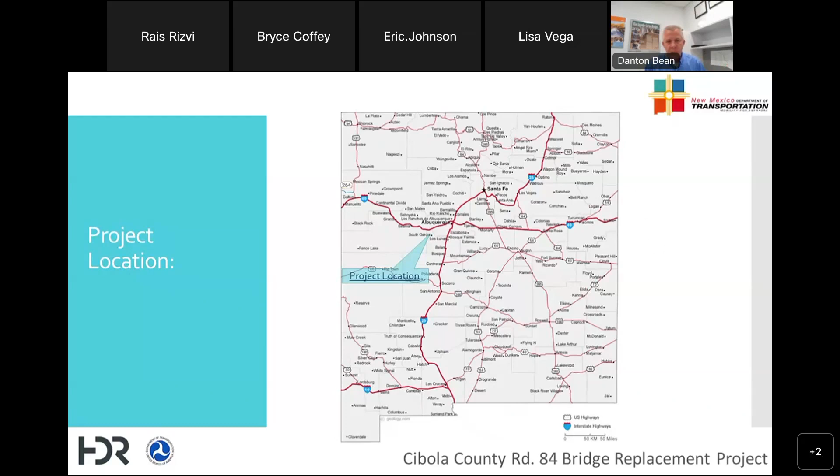So now let me describe a little bit about the project location. The project is located about 30 miles west of Albuquerque. And if I zoom in a little bit closer to the location, you can see I-40 on our slide, and at exit 126, if you go south on New Mexico 6 a few miles, you'll intersect with Cibola County Road 84.

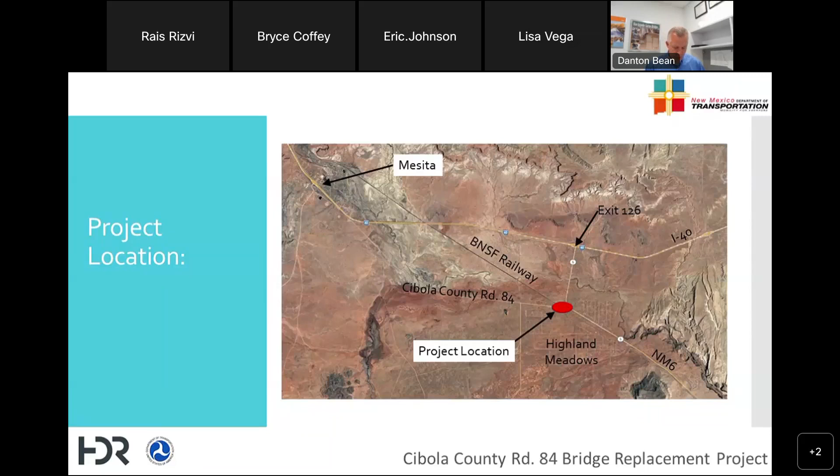You may also know this road as Historic Route 66 or Sparrow Hawk Road. And then zooming even closer into our project location, from that intersection, if you go a few hundred feet to the west, is the location of the existing bridge, and that's the structure that we're here to talk about in replacement.

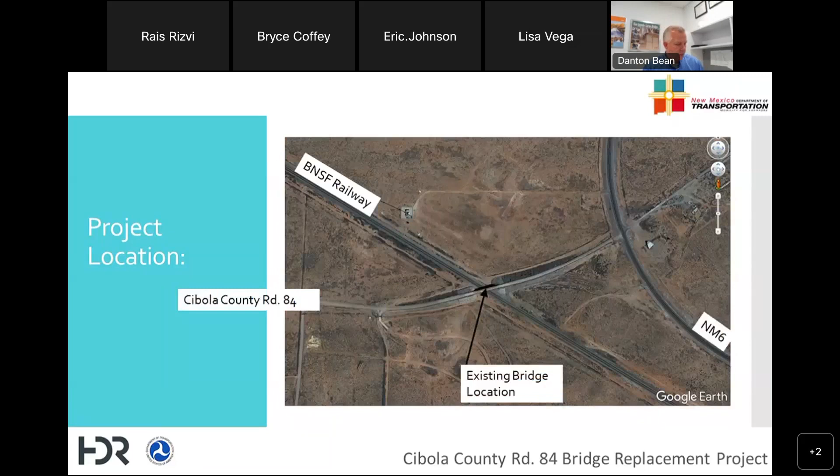Here's a picture of the project area looking west. You're probably real familiar with this view. Those that live in this area, you can see the posted weight limit sign to the right, and the profile of the roadway going up and over the railroad tracks.

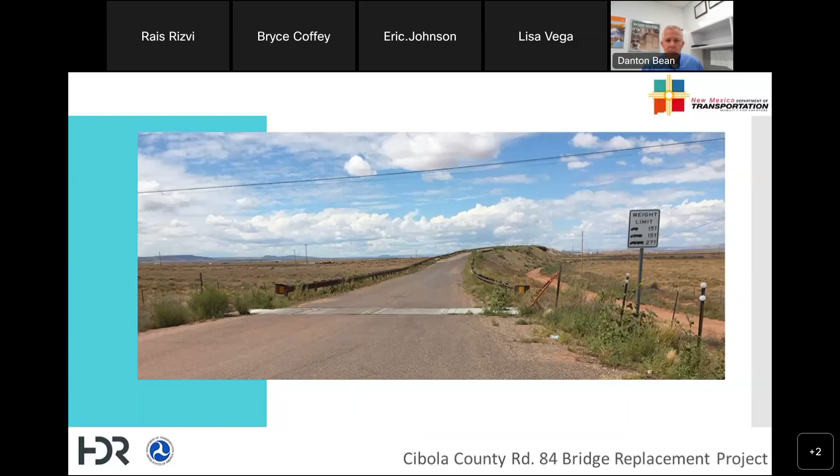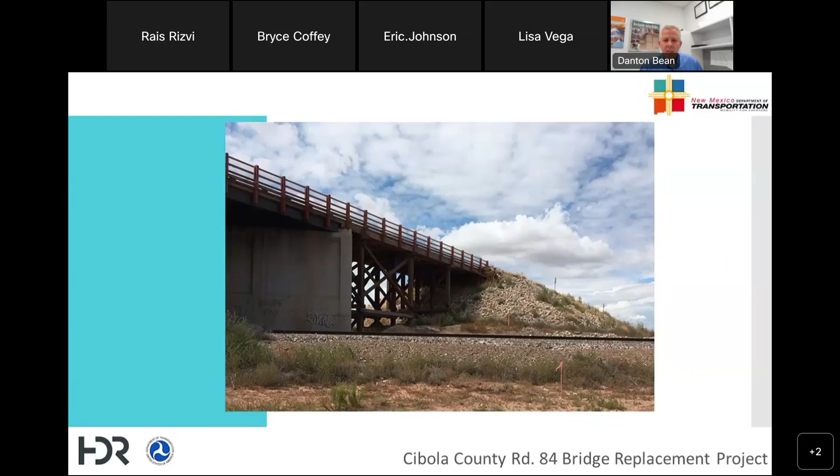Here's a view that's down closer to the bridge at the railway elevation, looking towards the bridge. You can see the concrete pier wall and the timber members of the end spans of the structure. This is a view up top on the roadway, and you can see the narrow width of the bridge and some of the failures that have happened on the roadway approaching the bridge.

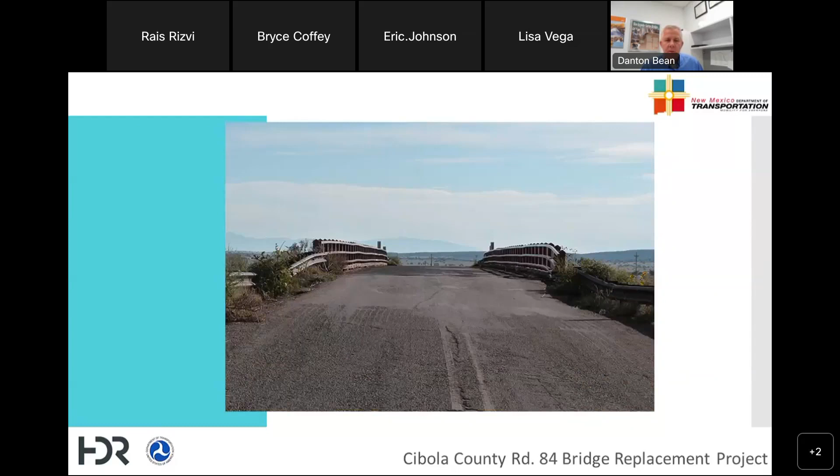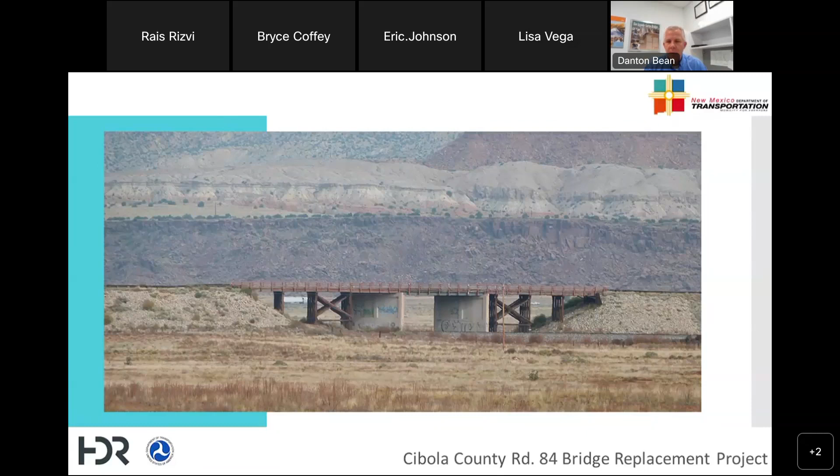This view is a little bit farther away from the structure and looking towards the north. Again, you can see the existing structure with its timber end spans, the concrete pier walls adjacent to the railway, and then the embankment, the approaching embankment that's built up with some rock covering rock riprap.

All right, so now let's talk about the purpose of the meeting.

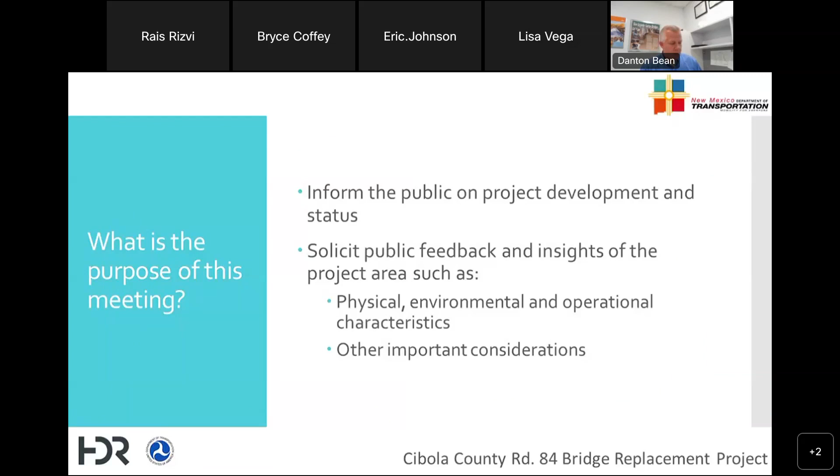This is an important meeting in our development of our project. We want to give the public information about the development, what has been happening, and also ask for your feedback and insights about the project area and the proposed improvements. That's really what we're doing tonight.

I want to talk a little bit about the history. The project started in 2016 with a study, and in that study we looked at several different alternatives. First, the no-build alternative, meaning there would be no improvements, no construction. That alternative was rejected pretty quickly—it would not meet the purpose and need of the project, so it was eliminated quickly.

A rehabilitation alternative was also considered, which would improve the existing structure and roadway to an improved level. Again, that alternative was eliminated pretty quickly because it did not fulfill the needs and purpose of the project. So then there were the build alternatives, meaning something new would be built.

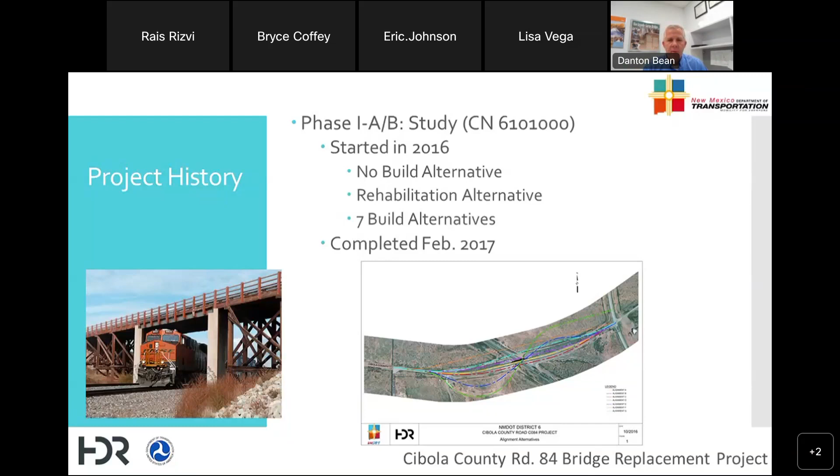We looked at seven different build alternatives. In the small exhibit towards the bottom, you can see some of the different alignments and alternatives that were considered. The study effort was completed in February of 2017. Here's a larger zoom view of the alternatives considered in the study phase.

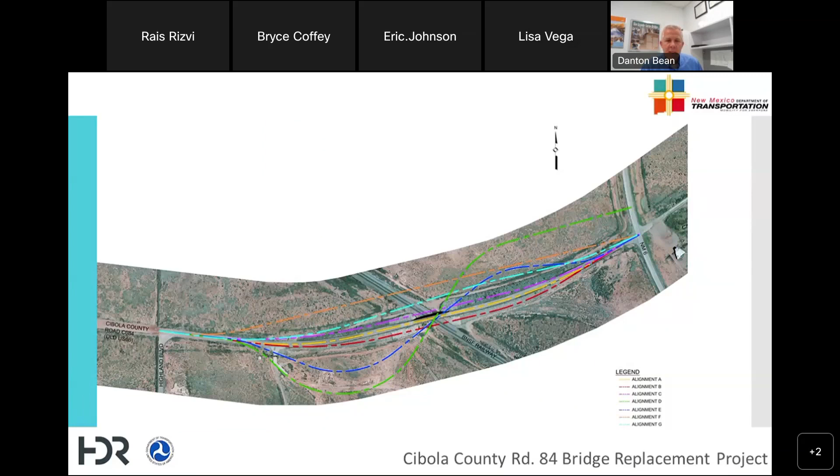We'll get into a little more detail about the selected alternative out of the study in just a minute. But before that, let me continue talking about the history of the project.

Another important aspect of the project development is the environmental documentation, which also started in 2016. An important part of that is public meetings and outreach. We held a public meeting in October of 2016, and there was a great turnout with a lot of strong support for an offset alignment and for allowing traffic to remain on the existing alignment during construction.

The other thing we heard during that meeting was a request for an additional left turn lane on New Mexico 6 at Cibola County Road.

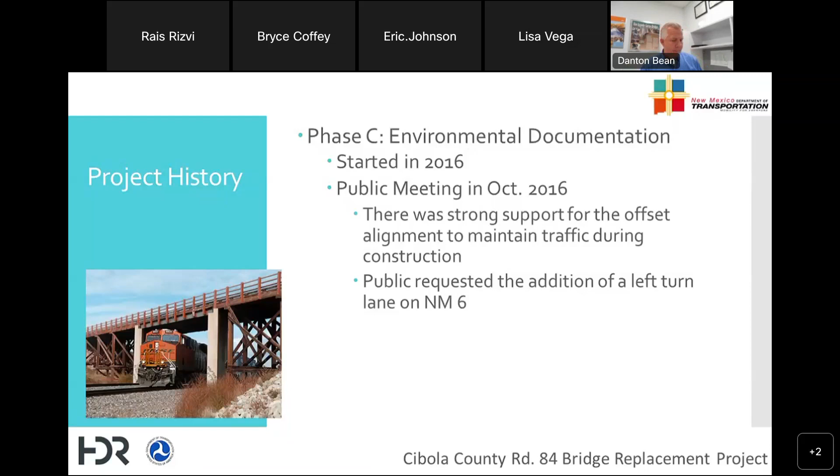The development of the project continued in 2017 to a preliminary design level, or 30% design. Development was paused in July of 2017 because there was a lack of funding—no funding for construction was programmed at that time—so development was stopped.

Now jumping to recent efforts: in November of last year, the design development was reinitiated. Part of the thinking around reinitiating that effort was the possibility of additional funding coming, and we wanted to get this project ready in case that funding became available for construction. We'll get into that funding discussion a little more in just a minute.

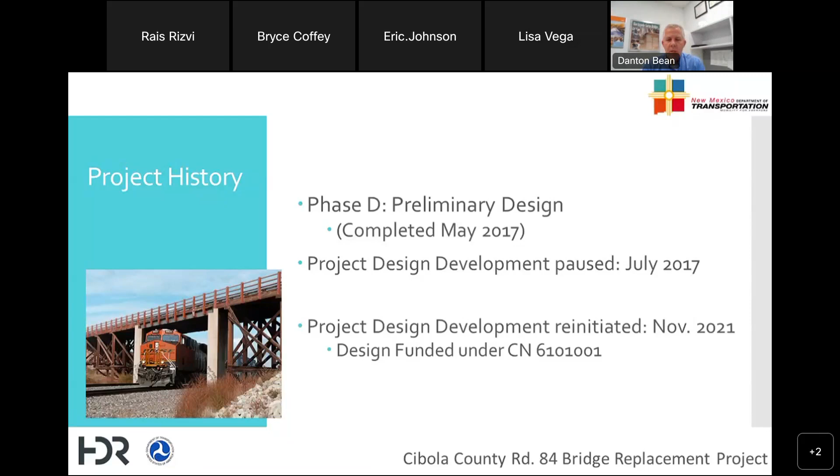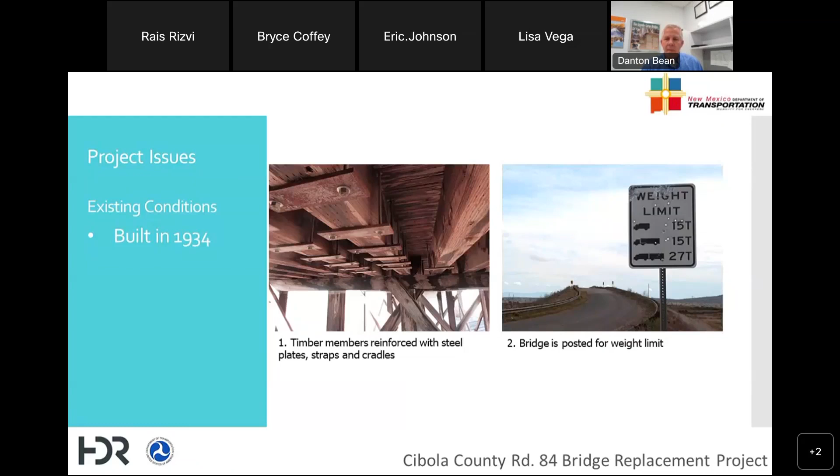Now let's make sure we understand the issues we're trying to correct. First, the bridge was built in 1934 and has really outlived its design life. Some of the timber members are reinforced with steel plates and straps, and the bridge is posted for weight. One other thing we heard during the public meeting was that these weight limit signs are often vandalized, removed, or damaged, and some people ignore them.

The bridge is narrow and does not meet current standards. The height and width for the railroad tracks also do not meet current standards and do not meet the railroad's desire for an additional track at some point. So those are really the issues we were trying to fix.

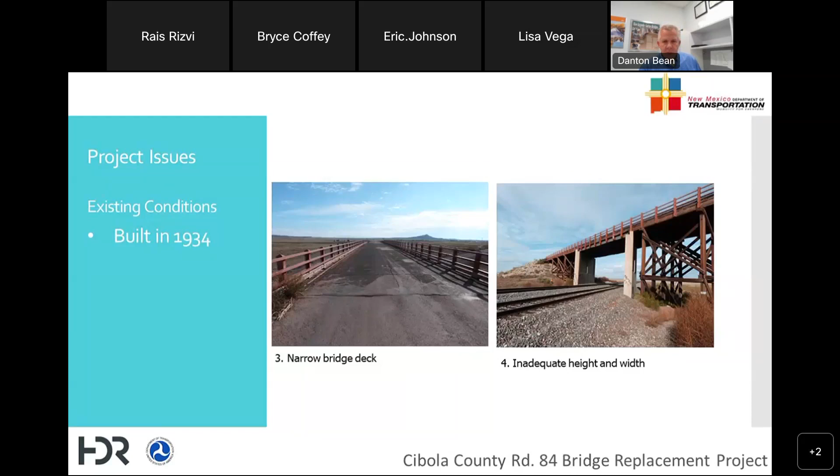Now let's make sure we understand the purpose of this project: to improve the safety and access for the public using this crossing, and to meet current standards for both BNSF and the Highway Department.

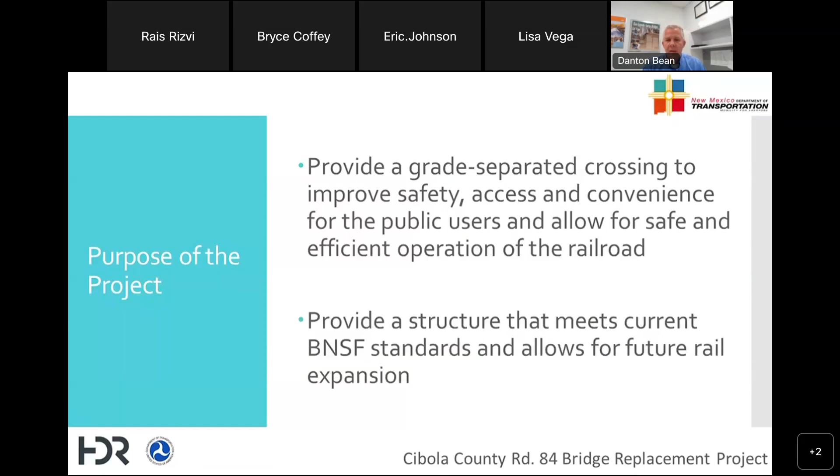Now I want to discuss the selected alternative. As mentioned, there was a strong voice at the public meeting toward an offset alignment for construction. The new roadway and new bridge are proposed to be offset to the north, allowing traffic to remain on the existing roadway while the new facility is being constructed. Once the new bridge and road are built, we would remove the existing bridge and roadway pavement.

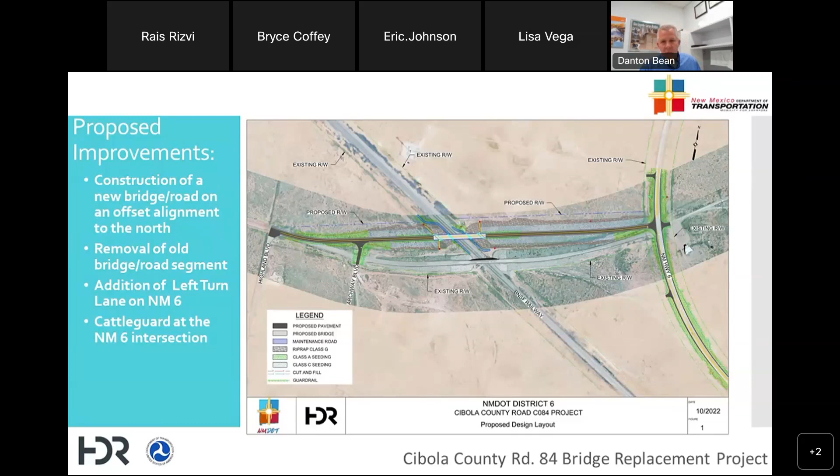We also would like to maintain the open appearance from the roadway with open steel railing, and then we want to improve upon the width and vertical clearance.

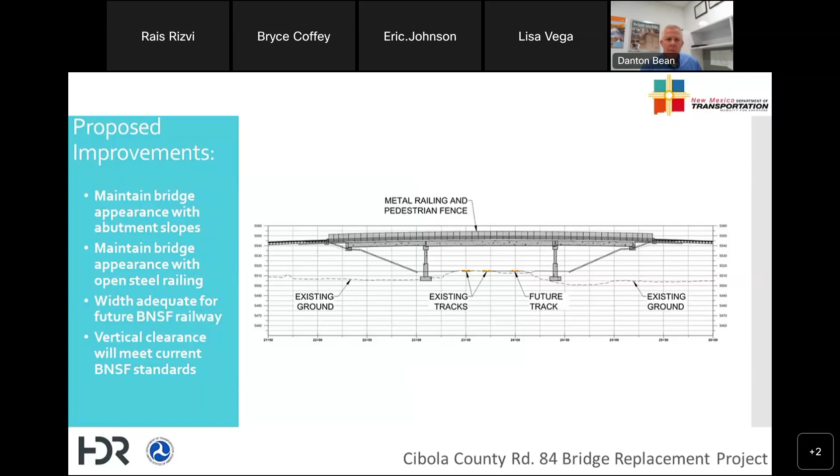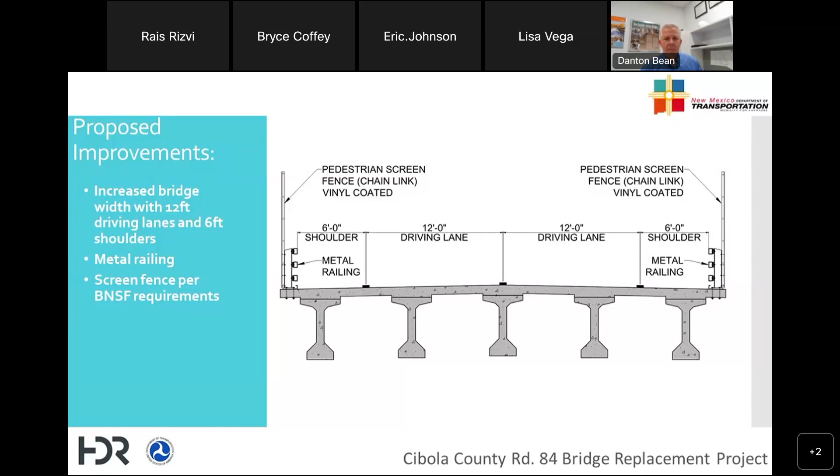This is a typical section of the proposed bridge, and you can see that it's going to be wider. We'll have shoulders on the roadway, driving lanes, and you can see the metal railing on each side. We're also proposing the addition of a pedestrian screen fence on the side of the bridge to help with safety of pedestrians and protect the railroad tracks.

Now let's talk a little bit about schedule and where things are going. We expect to complete the design of the project by the midpoint of next year. We also want to make sure we clearly communicate that the construction timing has not been determined—there is still a funding shortage for the project, and that funding has not been identified.

We were hopeful that additional funds could be available for construction. There's been a significant increase in construction costs that seems to be absorbing available funding, and allocating funds for this project hasn't occurred yet. It is definitely a priority for the district, and they're doing all they can to allocate funds for construction, but at this point the construction season schedule is not determined.

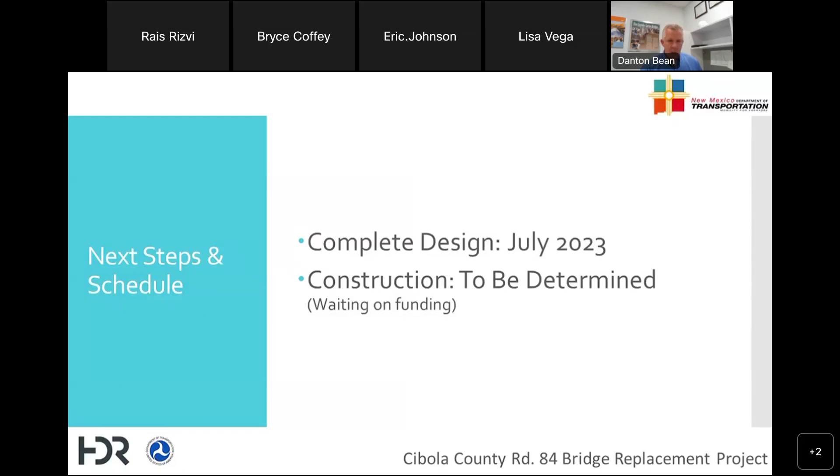So let me turn it back to Bryce to cover how to provide input and handle the Q&A.

Thank you, Dan. Our public comment period extends through November 21st. There are a number of ways you can provide comments. At tonight's meeting, you may ask questions to the study team, and we will try to take questions in the order they were received. If you aren't ready to comment tonight and would like more time to provide feedback, you can provide comments online via the project website.

You can also comment on the project phone line at 505-697-1985. You can email your comments to eric.johnson@nv5.com, or mail your comments to Cibola County Road 84 Bridge Replacement Project, care of Eric Johnson, NV5, at 4374 Alexander Boulevard Northeast, Suite K, Albuquerque, New Mexico, 87107.

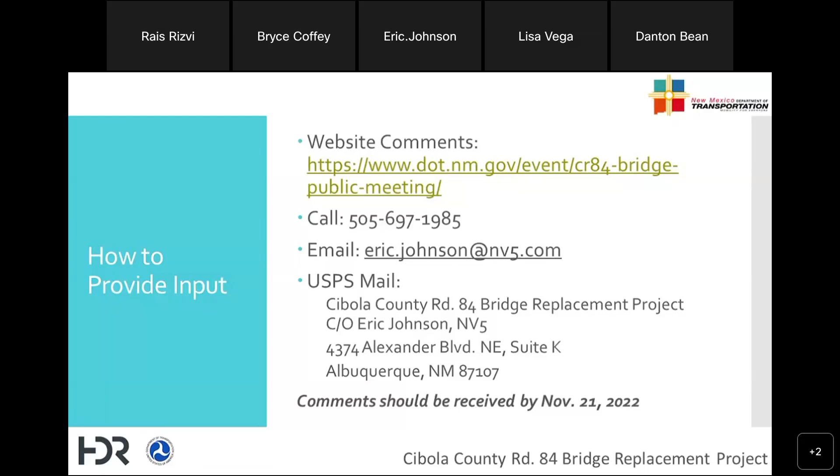On to the next slide. To verbally make a statement or ask a question, we ask that you please virtually raise your hand. Here's how to do that.

For those of you using WebEx through your internet browser, mobile phone app, or WebEx desktop app, simply follow the instructions on the screen. If you would like to ask a question or make a statement, you can click the raised hand icon. When you are called, the moderator will unmute your mic and allow you to speak. When you are finished, the moderator will mute your line, and we ask that you lower your hand by clicking the raised hand icon again.

If you are joining by phone as a call-in participant, press star 3 if you'd like to ask a question or make a comment. This gives us a hand-raised signal. When it's your turn to speak, we'll call on you and your line will be unmuted. When you finish speaking, press star 3 again to remove the hand-raised signal.

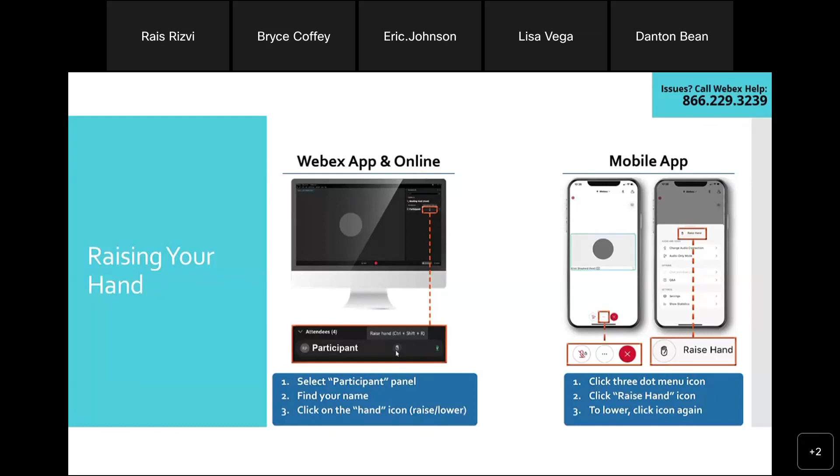If you have joined us using one of the WebEx applications, you may choose to submit your question or comment in writing using the WebEx Q&A feature; these instructions are displayed on the screen. Remember, if you are joining by phone, press star 3 to ask a question or make a comment, and when it's your turn to speak we'll call on you and unmute your line. Press star 3 again to remove the hand-raised signal when finished.

As a reminder, if you are having technical issues, please contact WebEx help at 866-229-3239. We will do our best to respond to questions in the order they are received—please be patient as we may have many questions. If needed, we can extend our meeting time by up to 10 minutes to respond to questions. If we still have outstanding questions, we will respond to written questions as part of the meeting summary and provide them to participants via email and post them on our project webpage. We will now begin answering questions.

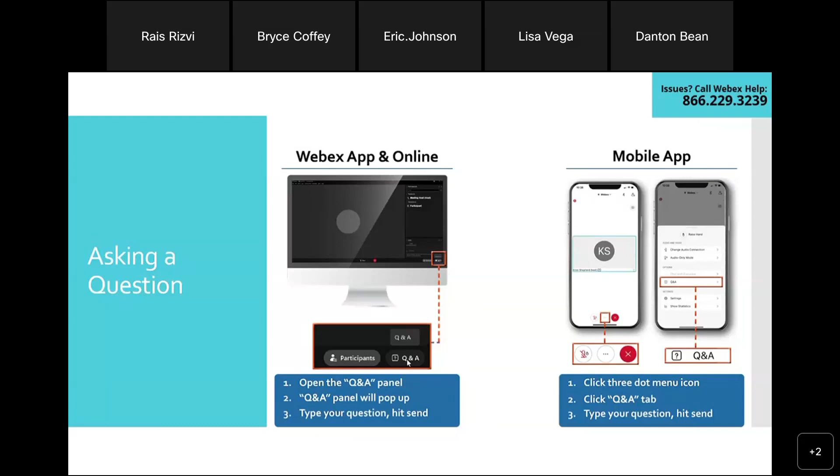We do have one question so far. People sometimes park on the bridge to take pictures. Can the bridge be posted for no parking to prevent this?

Thanks, Stephen. I appreciate that question. That was one of the comments we also heard during the last public meeting. There's a couple of things that will help in the new bridge. One, it will be wider up on top, but we do not encourage parking on top of the bridge. That is a safety concern.

But there will be signs added adjacent to the bridge that warn or discourage parking on top of the bridge. Stephen, did that answer your question? Yes, thank you, Danton. Thanks.

It does look like we have a raised hand from Lena. I'm sorry if I pronounced your last name wrong, Benavides. I'm going to request to unmute your line. My name is Lena Benavides.